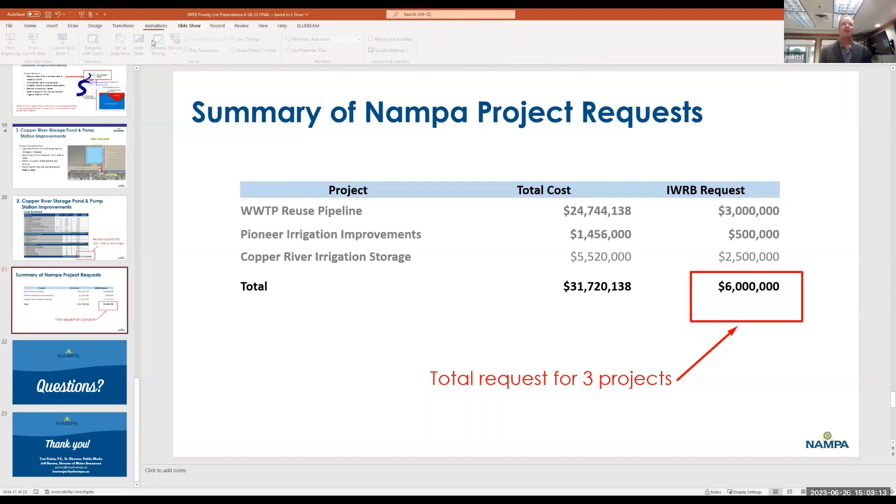I really appreciate the board giving us the opportunity to present these projects of regional significance. We've been following the board and some of your meetings over the past year. I really enjoyed getting to know some of you and watching how the board operates. I think this is really great for the transparency of this process and allowing others to submit projects. Sure, you'll have some hard decisions. There's a lot of needs across the state, and we see water issues all across the state.

So what we're really trying to do is be proactive, because we know that as we continue to grow, we need to be good stewards of the water. Nampa has done quite a bit of work on that in the past 2 years. During that last drought, we were getting worried about surface water in the Boise River Basin, so we formed a drought task force, which I'll talk about in this presentation. I'm the Senior Public Works Director, and Jeff Barnes is our Director of Water Resources. Go ahead and go to the next slide, Jeff.

We're going to introduce some basic topics on conservation, and then we'll get into the project specifics, which is our pipeline, system improvements to Pioneer, which is actually needed as part of the reuse program, and then the Copper River Irrigation Project is another one. Then in the summary, we'll summarize what we are requesting from the board. Next one.

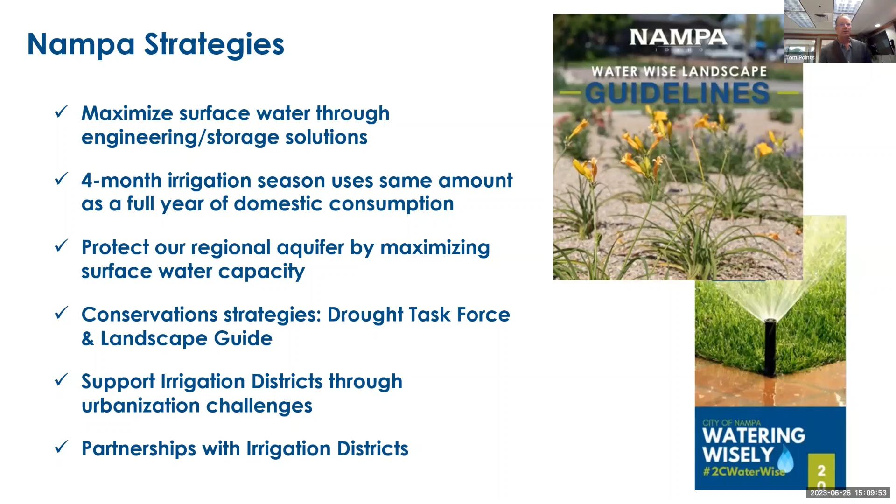So there's a lot of water that gets reused downstream, but it's also water that, if we can optimize our system, we could keep in the reservoirs longer. So we recognize the difficulty that an irrigation district has with a city, and we're trying to come up with solutions. The next slide.

So this is just a quick summary of all the facilities we have. We are the largest full service city in Idaho. If you take Boise, for example, they've got a private company that runs their water system. And Meridian, they don't have an irrigation system. They do have wastewater and water, but they don't have transportation. So we're a pretty diverse city. You see we have a domestic water system, a pressurized irrigation system, a wastewater utility, and stormwater.

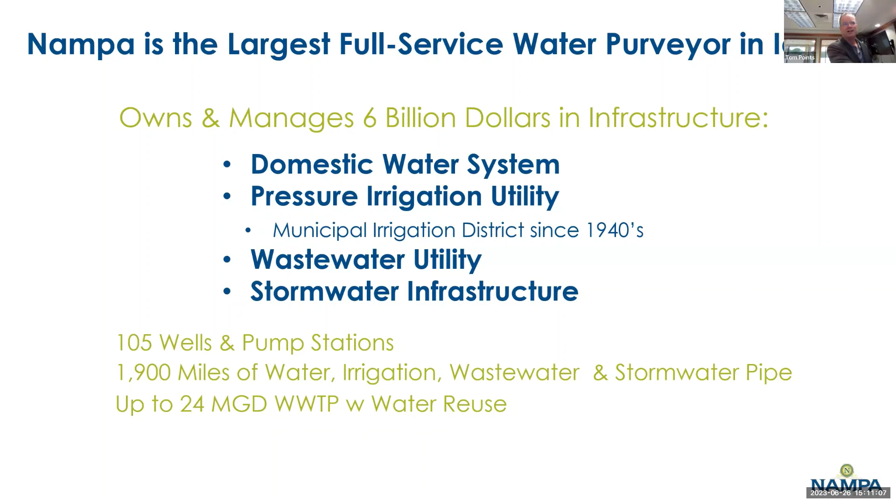And the pressure irrigation utility is something we're real proud of. We're actually a municipal irrigation district that we formed back in the 1940s. And we've pressurized our entire system, and it's all looped together. So it's a big regional system. It's quite unique for Idaho. I don't know of too many other cities that have something like we do. And you can see we've got lots of infrastructure, lots of miles of pipe, and we continue to grow. So we're just looking for solutions for conservation as we move forward. Okay, next slide, Jeff.

Okay, so I just again want to thank you for your time. You're going to hear from Jeff now about this project's specifics, and I will stand for any questions at any time during this presentation. So thank you. Are there any questions from the committee? All right, thank you.

Yeah, thank you, board members. Again, my name is Jeff Barnes. I'm the Director of Water Resources here in Nampa, and I'll be going through the 3 projects. Certainly, if there are questions along the way, interrupt me. I'll kind of leave some gaps in between each of the 3. We want to just thank you, Mayor, City Council, and our staff for your consideration of these projects, and we

appreciate your time. So with that, we're going to start on the first project, which is our wastewater treatment plant reuse pipeline. So it's part of a larger project of 180 million. You're looking at that picture of our wastewater treatment plant, which handles 11 to 12 million gallons a day now. And then this is sized for 21 to 24 million gallons a day at peak in the future.

The reuse pipeline, the facility is in the treatment portion of it, 71 million of the 180 million. So high dollar value to treat water to these Class A standards we'll talk about a little bit more. So this project is set to be completed by fiscal year 2025.

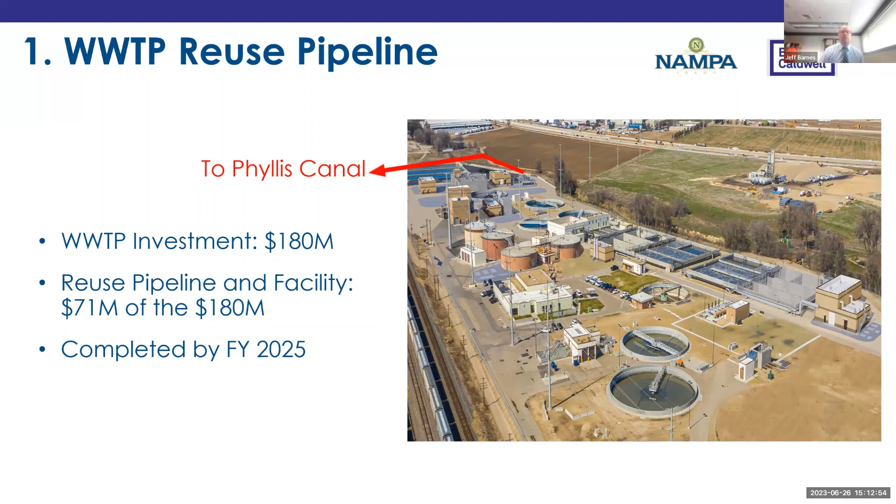So a little bit about the pipeline. This pipeline extends out of what we call our clean water facility, and it is a 4-foot poly pipe that's going to extend from this clean water system at the end of the treatment process. It's going to run around the plant. We're going to push it under the UPRR railroad lines and run it through the Ed Meyer parking lot to the Phyllis Canal, where we're building an outfall.

And that picture on top there is the alignment of the pipeline. About a mile, and then the outfall structure is going to be a little bit different than what's shown there. That was the original outfall. It's going to be a little bit more natural looking with landscaping now, but again, that's where in the summer months we will be discharging our treated Class A reuse water to the Phyllis Canal. In the winter months, we will continue as we do now to discharge to the Indian Creek pipeline.

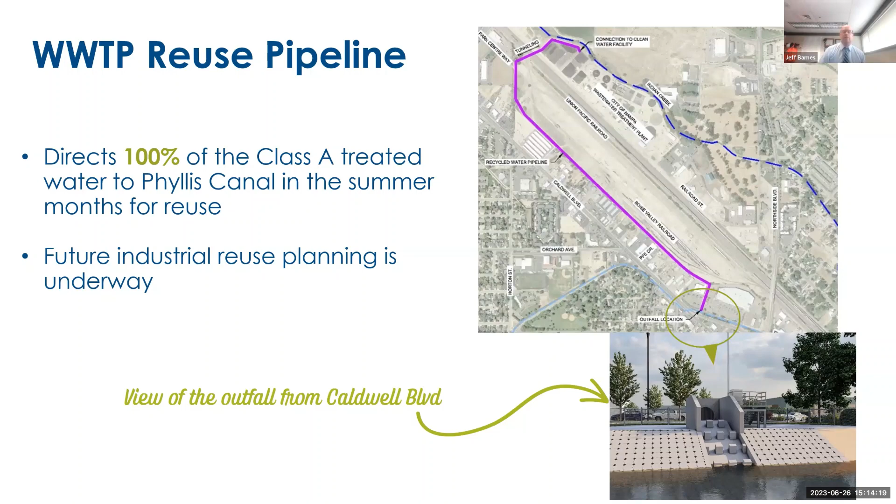There's also, we'll talk about options in the system, the way it's designed to add an industrial reuse capacity. Instead of pushing all of this line to Phyllis Canal, we can eventually in the future push it in and serve industrial customers.

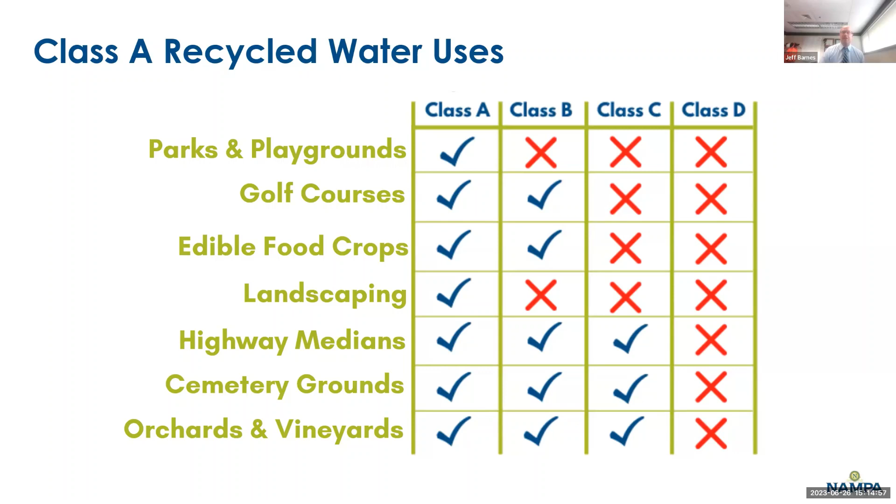Just a little bit about Class A. So it can serve parks, playgrounds, golf courses, edible food crops, landscaping, highway medians, cemetery grounds, orchards, and vineyards. So with the cost that we put in to treat the water to this level, we have a very beneficial product when it is finished with the treatment process. And again, stop me along the way if you have any questions. Again, I'll stop at the end of this section if you have any specifically also.

Okay, again, the Nampa reuse pipeline, the process itself. So with our permit after 2026, our phosphorus and temperature requirements increase. And so what this project will do is, in the summer months when our phosphorus requirements are high, it will be pumping to the Phyllis Canal, where we will be able to have a lower requirement, which will save the city resources, and it will provide a beneficial use for our citizens and agriculture downstream.

So again, during the winter months, we will continue to discharge to Indian Creek. And then in the summer months, starting in '25, we will push water through the 4-foot pipeline to the Phyllis Canal, and that will be 11 million gallons per day used by the citizens of Nampa before it even leaves the city limits and heads towards Caldwell.

This is 5,000 acre feet per year, and this is equal to the acre feet that we requested to be considered for as part of the Anderson Ranch Dam raise. So this is a significant reuse project for the city of Nampa.

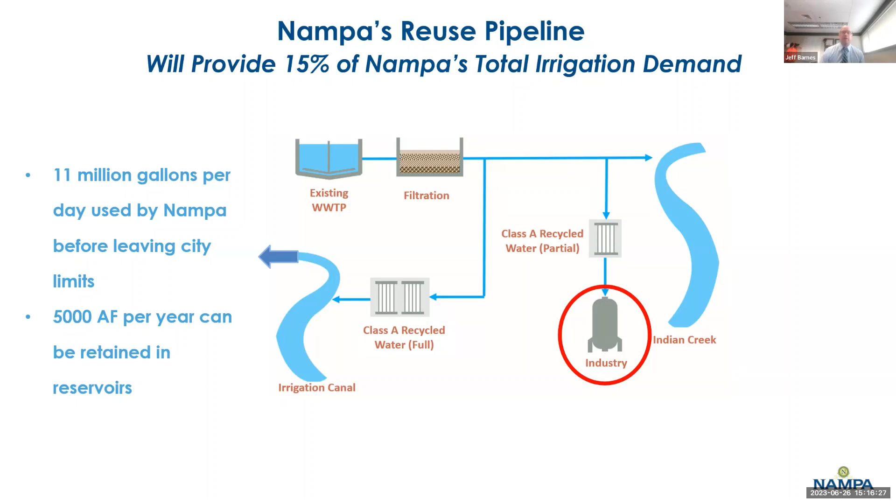Oh, and one other thing, we'll provide 15% of total irrigation demand for the city. So it gives you an idea of just how beneficial this project is to the city. Funding sources for this project: $165 million we received from a revolving fund. We went out to a bond vote several years ago.

The 12 million we've shown there is part of our enterprise rate increases, although we still have 2 of those rate increases remaining. I'll go into that a little bit more, and that really focuses on the need for the money, our rate and the pressure on our taxpayers. And then we got a Bureau of Reclamation WaterSMART grant for $3 million.

So when we originally started planning for the overall project, we had 5 years of 16.75% increases for citizens, and then a year of 8%, to pay back the $165 million bond and pay for the remainder of the project. But if you see, and it's kind of hard to read here, this is a comparison of how Nampa's rates compare to other cities in the region.

And Greenleaf is at the top, and that's because smaller cities are really impacted. As you know, they have to put in expensive wastewater infrastructure and have a lower population, so that is spread out among fewer people, and they are the highest at $89 per month. But Nampa, if we finish off our proposal with the remaining 16.75 increase and that 8% increase, will be at 59, almost $60 per household per month, which puts us relatively high in the region.

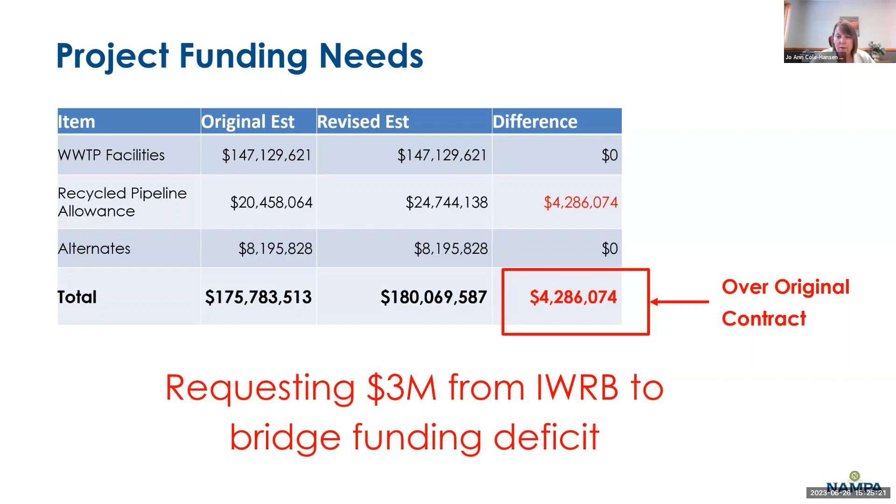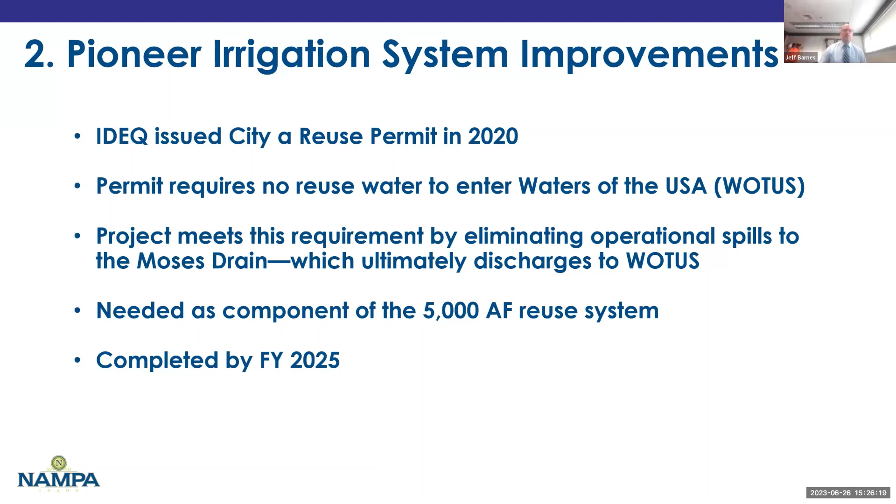Okay, thank you. So I'll move through these a little bit quicker. I know we're up against a little bit of time here. So there's two other projects. This one is very much connected to the reuse pipeline project. Tom mentioned that part of our recycled water permit said that we can't discharge to the waters of the U.S. So this helps us to satisfy that requirement. IDEQ issued a reuse permit in 2020. Since part of that is we can't discharge to the waters of the U.S., this project eliminates operational spills to the Moses Drain, and gets into the weeds here a little bit, but ultimately that Moses Drain went to the waters of the U.S. So this project diverts water from going into the Moses Drain, and it's needed as a component of the reuse system. And then we anticipate this being completed by 2025 also.

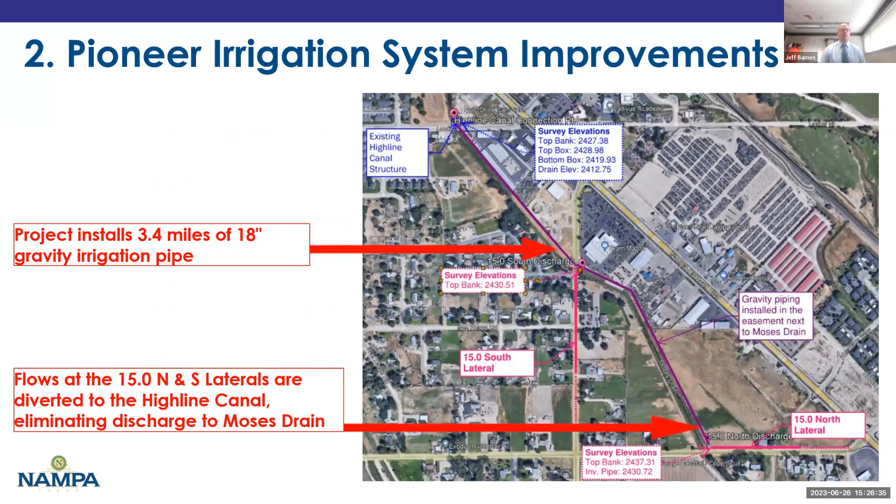So this is a picture. It is about 3.4 miles of gravity, 18-inch pipe. It flows from the 15.0 lateral and it diverts to the Highline Canal. The cost estimate for this is $1.456 million, and we're requesting $500,000 from the Idaho Water Resource Board on this particular project.

This was a couple of options on the design. One was an actual pump station, a pump back option from the Moses Drain, which was much more expensive, and operationally we would have had long-term costs with it. So this gravity line is much less on the maintenance side and the operation side and the annual cost for it. So we felt like, even though the cost is high, it was a reasonable solution to the need for our permit. So I'll stand for any questions on this before I move on to the third project.

Any questions? So I guess I have one question here. The 500,000, will this project be a fixed asset for the city of Nampa or for Pioneer Irrigation District? Yeah, can you repeat your question? When this improvement is done, will this become a fixed asset for the city of Nampa or for Pioneer Irrigation District? Whose asset will this be?

Yeah, thank you. So it's a benefit for the city. It's also a benefit in regulating flows for Pioneer. So we will have an MOU with Pioneer, and the city will ultimately be responsible to maintain this. Okay. I think there is a beneficial use also to the Pioneer Irrigation District. Okay, thank you for that. Any other questions? Madam Chair, Board Member Barker?

Okay. And the last project, so we have a pressure irrigation system that runs throughout the city. And the Copper River Storage Pond and Pump Station improvements is a way that we improve the resiliency and the capacity of our system. So the project itself includes constructing a storage pond and a pump station. This will provide irrigation storage for drought and peak use periods. So during off-peak use, it'll fill up, and then we can pump as much as 5,000 gallons per minute out of the pond during those peak use times to offset those spikes, those peaks in our system use curves.

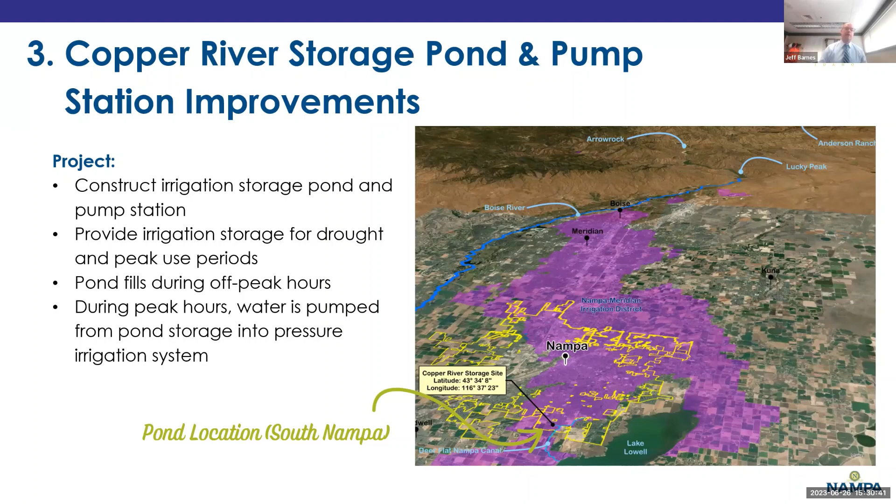And again, the pond is located in South Nampa, and it's property that we need to purchase. It's a property that's considered for development right now. So the project benefits: reduced waste, 34% of our water is wasted to drains. Of course, a lot of that is used downstream, but we just want to be more efficient with the surface water that we have in the system. It definitely improves service during droughts. It mitigates impacts to the potable water system. In that area, we actually supplement our system with potable water. And then it reduces future supply needs.

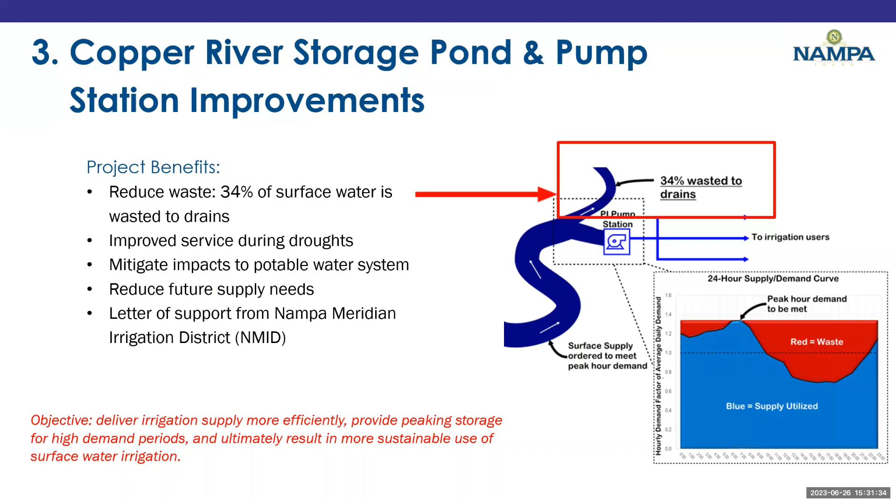I mean, 5,000 gallons per minute is a couple of wells or larger, wells and pump stations. We did receive a letter of support from Nampa Meridian Irrigation District, and we have a very good relationship with both Nampa and Pioneer Irrigation. So the design consideration for this project assumes that 3 acre feet of storage is needed. We'll construct a pump station on the north side of the road as shown in the exhibit. The pond will supply 5,000 gallons per minute for bursts in the peak hour. And construction will be completed by 2025 to 2026.

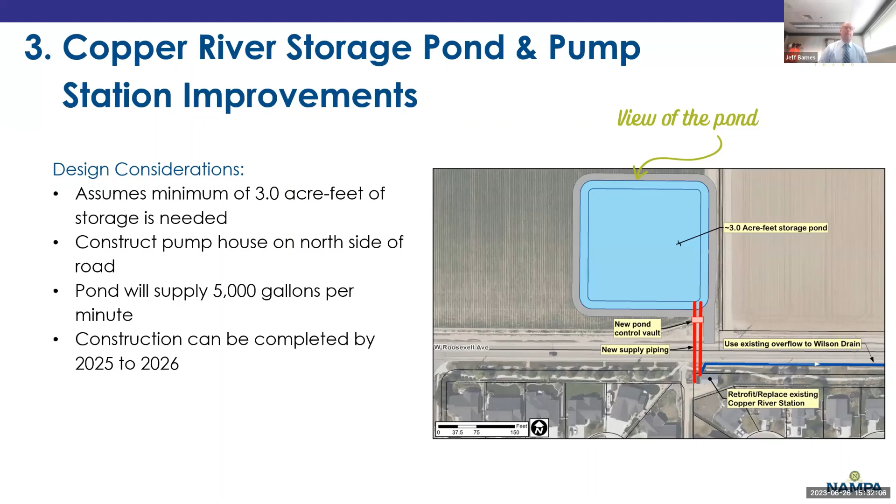The cost for this is $5.5 million, and that does include the property and the pump station. We're requesting $2.5 million on this portion. This is one of the ponds where we will need additional storage within the system to make our overall system more consistent and resilient. On the south side of town, this is an important project for us to increase capacity. I-84 runs right through Nampa, and north and south zones are completely separate. So this is in our south zone in the city.

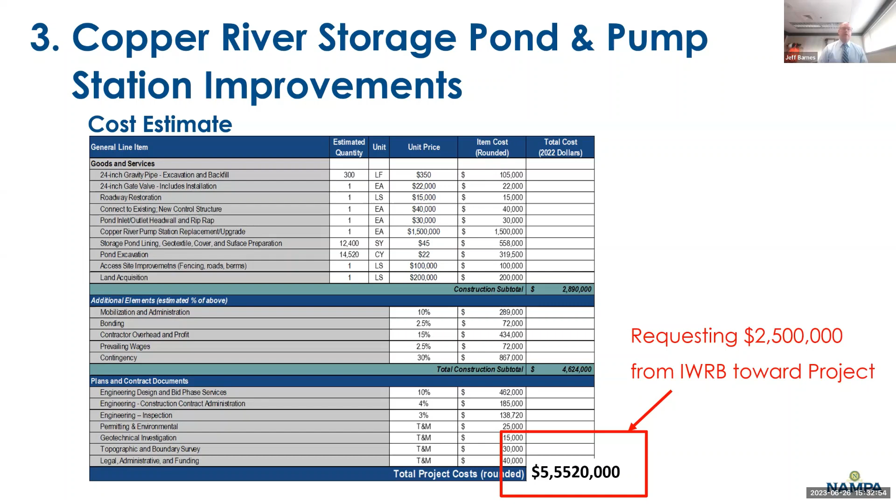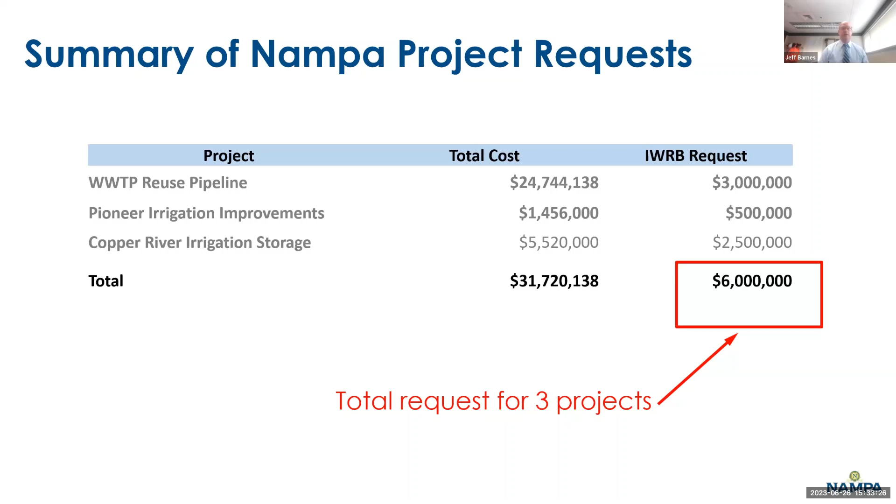So I'll stand for questions on this, but before I do that, I just want to summarize Nampa's project request. Looks like we're pretty close to time or a little bit over. The first one was the wastewater reuse pipeline. The total cost for that portion was $24 million, and we were requesting $3 million. The Pioneer irrigation improvements was $1.4 million; we're requesting $500,000. And the final project, the Copper River irrigation storage, is $5.5 million; we're requesting 2.5, for a total of $6 million. Tom and I will stand for questions on any one of the projects. So thank you to the board.

Any questions? Madam Chair, this is Dean Stevenson. Yes, board member. The question I have, this pond you're building, is it going to be a lined pond? You're going to line it? This 5 acre pond or however many acre feet it was going to be? Yeah, so we have other ponds planned, including this one, and we did put a liner into the estimate.

Okay, does that answer your question, board member Stevenson? Yes. Thank you. Madam Chairman, this is Mark. I'm not sure I heard the answer, whether that did include a liner or did not. Yes, sir, board members, it does include, they will be lined. This pond will be lined. Thank you.

I assume that you did not put in for the Bureau of Reclamation's WaterSMART Small Storage grant because you're not an irrigation district. Is that a correct assumption? Madam Chair, members of the board. So actually we did put in on the WaterSMART grant. So I mentioned in the beginning, we have 3 irrigation districts. We've got Nampa Meridian, we've got Pioneer, and then Boise. We want to build a pond in all 3 of the irrigation systems' plumbing.